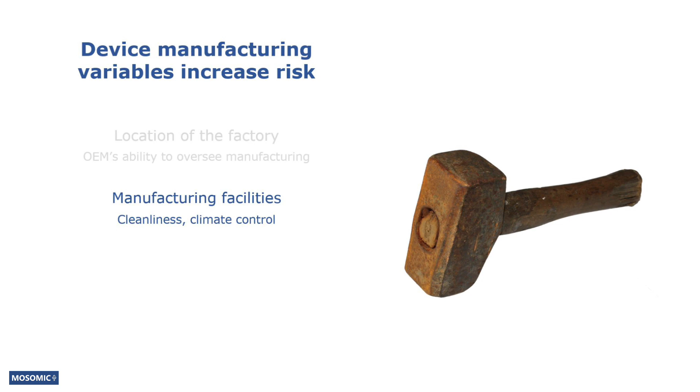Manufacturing facilities, for example, cleanliness and climate control. Production personnel, their know-how when it comes to handling MEMS microphones. And production equipment, for example, accuracy, age, and suitability for microphone handling.

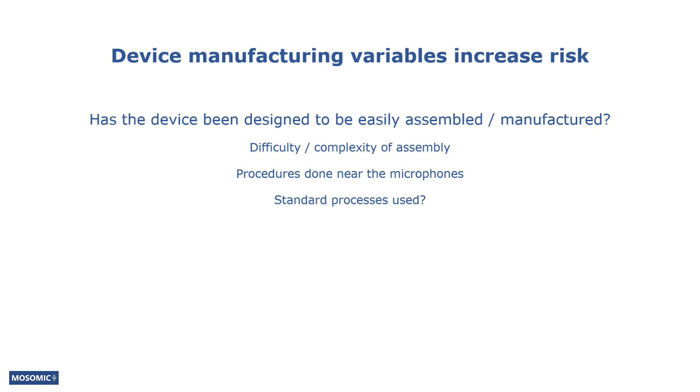Also, the design of the device and its assembly processes can have a big impact on the safety of the microphones. The difficulty and complexity of the device assembly is a key factor. Also, all assembly procedures done near the microphones increase the risk of problems. It's very important that standard procedures and guidelines provided by the microphone supplier are followed.

The microphone supplier typically knows what the microphone can take and what it can't, so their advice should be listened to. Of course, sometimes their requirements may be overly cautious because it's in the microphone manufacturer's best interest to minimize problems. Sometimes a compromise has to be made between increased device production cost and time and microphone safety.

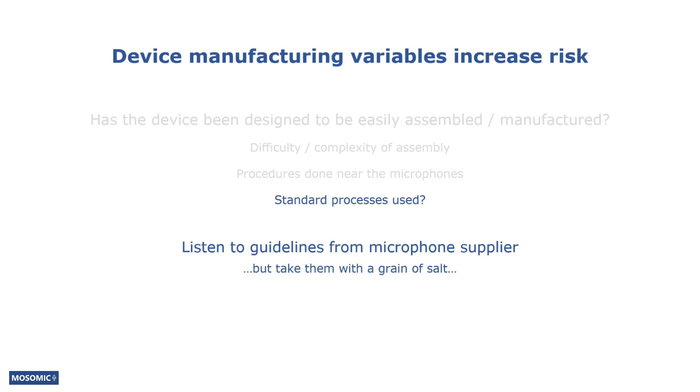Microphones are typically tested at the end of the device assembly process to make sure they work like they should. Sometimes tests may be done also for sub-assemblies. The ability of the tests to reveal problems must be ensured.

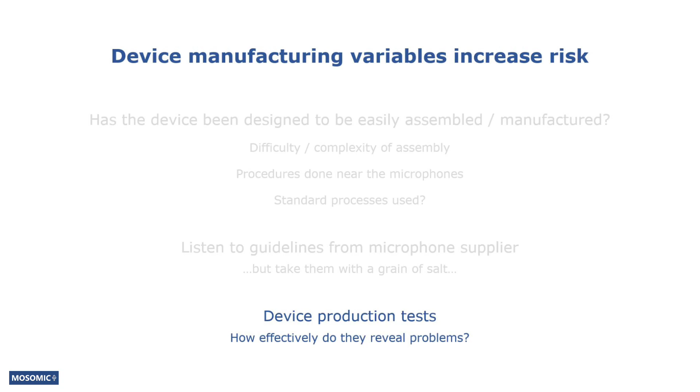There's a wide variety of threats to microphones in device production. First of all, there are mechanical threats. Touching, poking, or other mechanical stresses can compromise the integrity of the microphone package or the microphone sensor. The sensor is in danger if something, for example sharp tweezers, are inserted into the sound port, or if the package is subjected to excessive mechanical deformations or forces. Also, the solder contacts under the microphone may be in danger if the microphone is poked.

Microphone manufacturers don't typically specify any impact forces that would be allowed on the microphone. In other words, all impacts are forbidden. But the maximum mechanical pressure that can be applied on top of the microphone is often specified in the component datasheet.

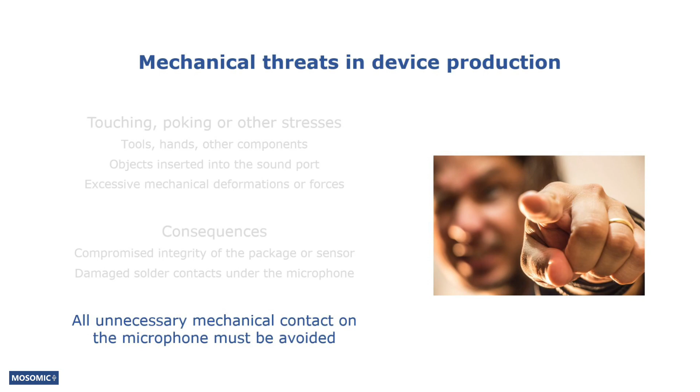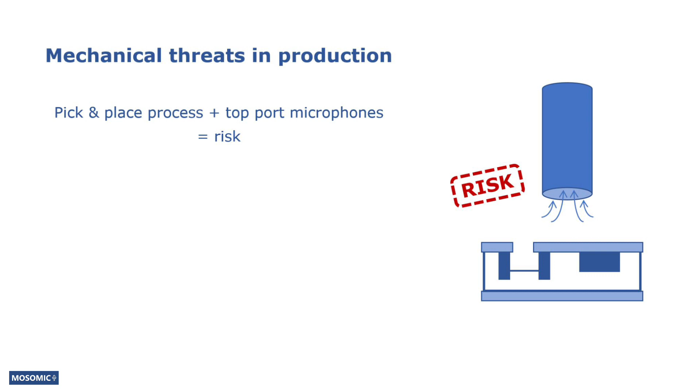Second, the pick-and-place process may jeopardize top port components. In the pick-and-place process, the component is picked from its transportation package, typically a pocket in a tape that's carried on a reel, and placed onto the device circuit board. If the vacuum nozzle of a pick-and-place machine is used to pick up a top port microphone on top of the sound port, the sound sensor is exposed to a strong negative pressure shock that may damage it.

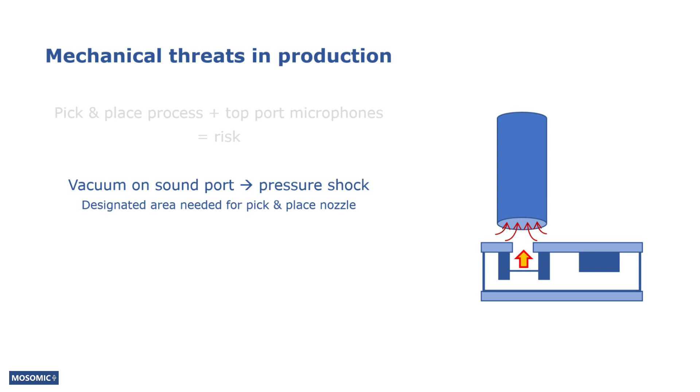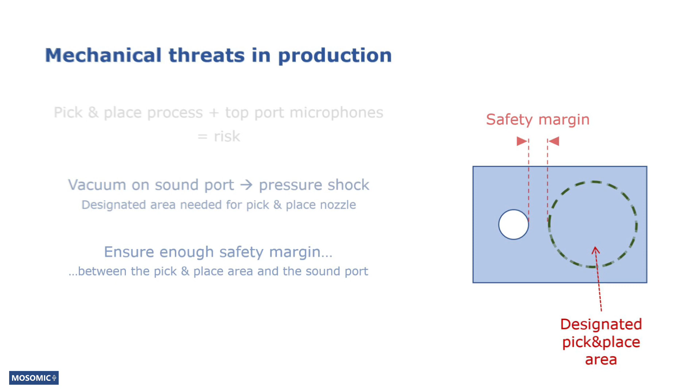Therefore, there must be a designated area for the nozzle of the pick-and-place machine on top of a top port microphone to minimize the chances of pickup being done on top of the sound port. There must also be enough safety margin between the pickup area and the sound port to take into account all tolerances that affect the accuracy of the pickup point. Nozzle dimension tolerances, nozzle placement in the pick-and-place machine, accuracy of the pick-and-place machine, microphone location in the tape and reel, and so on.

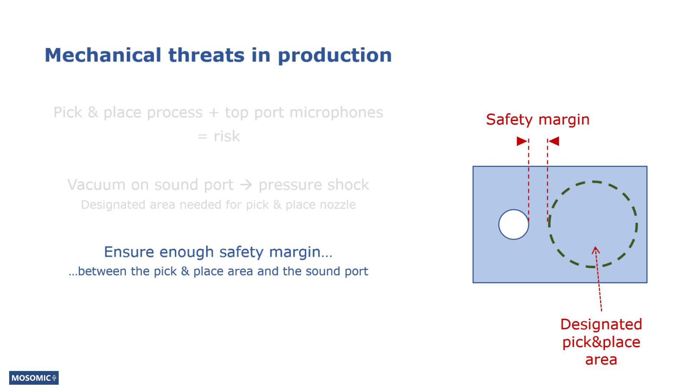The pickup area and recommendations for the vacuum nozzle dimensions should be specified in the microphone datasheet. Bottom port microphones are not in danger because the sound port is located safely under the microphone.

The microphone may also be affected by contamination. The source for the contamination can be production facilities with compromised cleanliness, or, for example, circuit board routing or sawing that may be done near the microphone. There can also be other messy production procedures.

Another threat for MEMS microphones is the cleaning of the device circuit board or an assembly. Common cleaning methods, such as pressurized air, wet cleaning and brushes, can all damage microphones. If pressurized air is applied directly onto the microphone and into the sound port, it can damage the sensor. Wet cleaning is a liquid contaminant that can affect the microphone negatively. The bristles of a brush can also poke into the sound port with dire consequences.

It's important to acknowledge that, after assembly on a circuit board, bottom port microphones are exposed to threats such as contamination that originate on the other side of the board because of the sound channel that goes through the board.

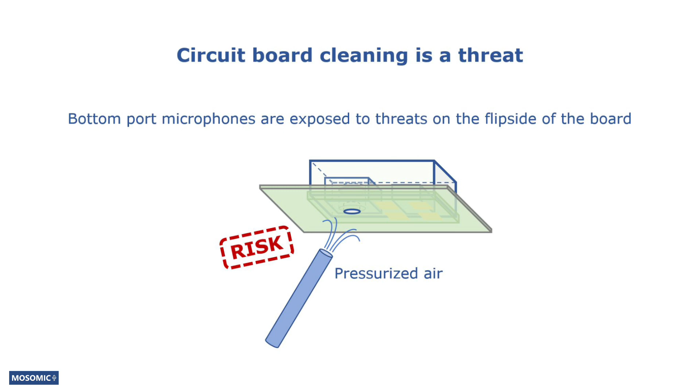Excessive temperatures are another risk to be taken into account. The temperatures can rise too high, for example, if the reflow process of the device doesn't follow standards or if the process is poorly controlled.

The microphone may be exposed to too high temperatures or mishandling also if the microphone is reworked, meaning that a faulty component is replaced with a new one at some point after the reflow process. It should be noted that a microphone gets heated up also if the component next to it gets reworked. The allowed temperature profiles that the microphones are designed to withstand are given in microphone datasheets.

Electrostatic discharges, ESD, are another significant threat microphones face in device production. Like I explained in episodes 9 and 21, the threat is twofold. The discharge can damage the microphone electrically or mechanically because of the pressure pulse caused by the rapid air expansion around the discharge. MEMS microphones are typically designed to withstand ESD.

The immunity levels are given in microphone datasheets for maximum ESD voltage values that the pins of the microphone can withstand. Different values are given for discharges applied via air and in direct contact with the pads. The values vary also for different scenarios, such as a discharge that originates in a person versus a discharge coming from a piece of production machinery. Datasheets may also include ESD-related instructions. If not, you should ask your microphone supplier for advice.

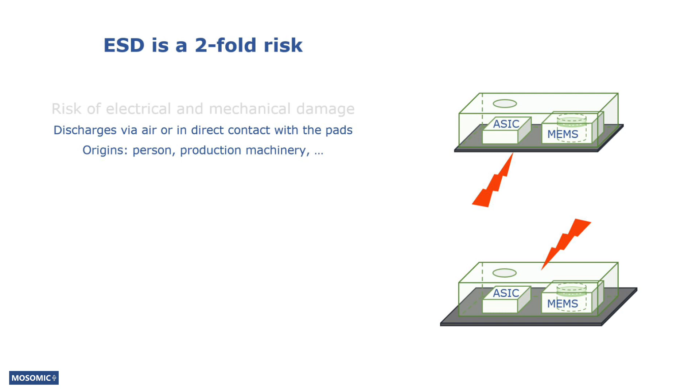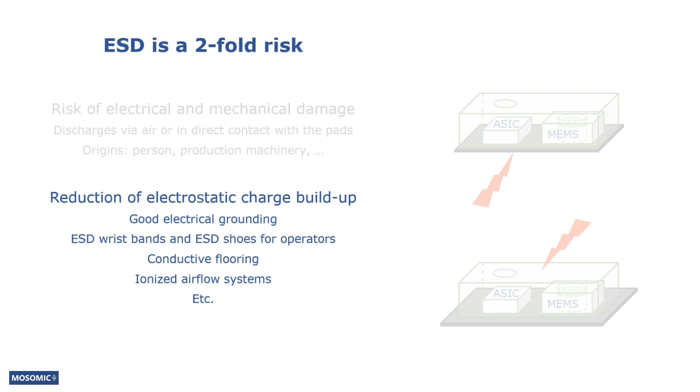To minimize the risk for microphones and for other components, it's important to take the normal ESD precautions in device production. Good electrical grounding of the production machinery, ESD wristbands and ESD shoes worn by the production operators, conductive flooring in the facilities, ionized airflow systems over open trays and reels of microphones, and so on. These methods reduce the buildup of electrostatic charge in people as well as in machines. There are specific standards for the ESD handling of CMOS devices that are good rules to follow also in MEMS microphone production.

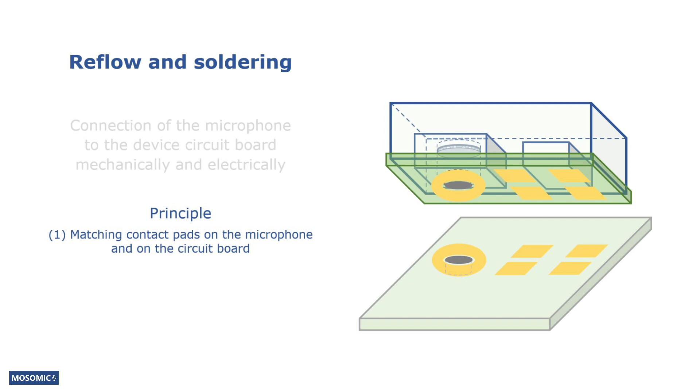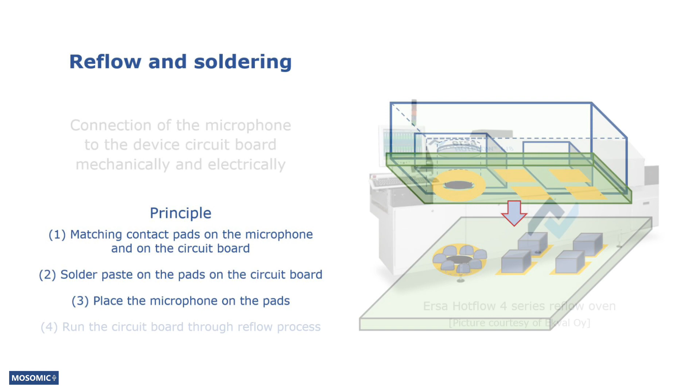I talked a bit about reflow and soldering already, but let's go into a bit more detail. The purpose of soldering is to connect the microphone onto the device circuit board electrically and mechanically. The principle with solder connections is to have matching contact pad patterns on the microphones and on the circuit board, to apply solder paste on the pads on the circuit board, then place the microphone on the pads and run the whole circuit board with the microphone through a reflow process. The reflow process is done in an oven in which the solder material contained in the solder paste melts and adheres to the pads on the microphone and on the circuit board.

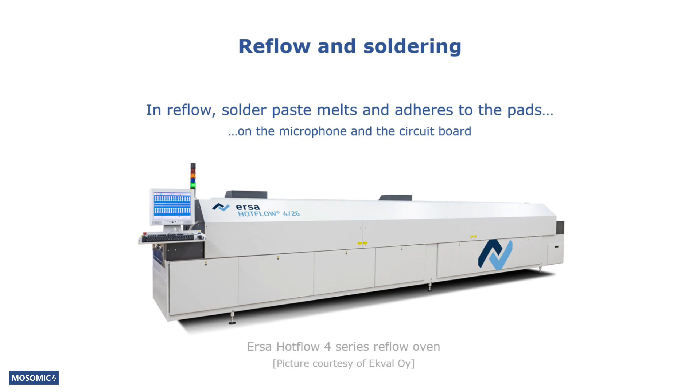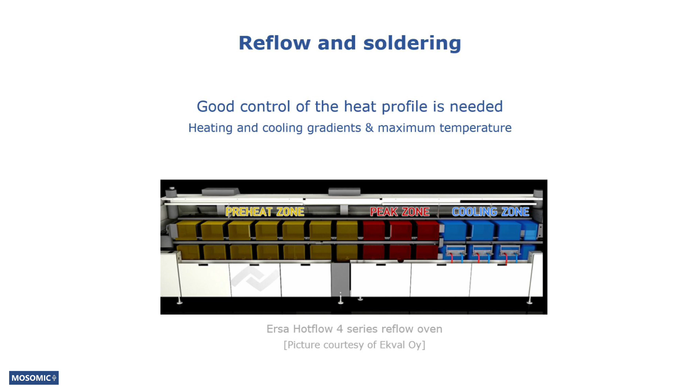The temperature profile that the boards are heated with in the oven is carefully designed to heat, melt and cool the solder connections in a controlled way. The profiles define the heating and cooling gradients as well as the maximum temperature that the microphones experience. The profiles typically follow IPC JEDEC standards. Microphones should be designed to withstand at least 3 soldering processes without significant impact on the reliability or performance of the component. Enduring more than one reflow is required because in many cases the circuit boards go through reflow twice, once for each side of the board. For MEMS microphones, this is typically not a problem.

The consumer electronics reflow profiles currently used are designed for lead-free solder that is less of a burden on the environment than solder with lead. The maximum temperature that microphones should face is 260 degrees Celsius, but in poorly controlled processes this may be exceeded significantly. Exceeding the specified maximum temperature is a reliability risk, so unnecessary thermal stress on the microphone, other components, as well as the circuit board should be avoided.

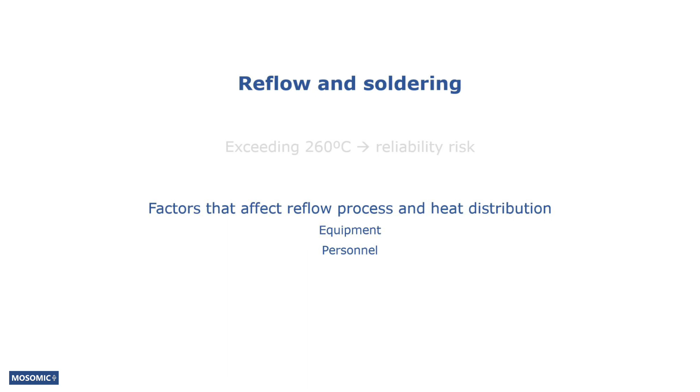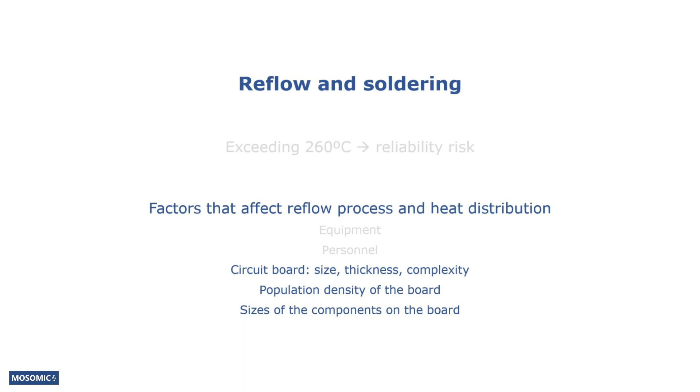The actual level of control on the reflow process and the temperatures that the microphone heats up to depend on the equipment and the skills of the personnel running the reflow process. The level of control depends also on the size, thickness and complexity of the circuit board, as well as the population density of the board and the sizes of the components on it. For example, heat propagation and distribution in a sprawling, flexible circuit board may be difficult to predict and control.

Also, the temperature rise and fall gradients that the microphones face can vary significantly. Too fast heating may cause pressure buildup when the air inside the microphone expands quickly. In the worst case, this can cause the microphone package to disintegrate. This is the case especially for microphones in which the package is held together with solder connections that melt during the device board reflow. Packages held together by adhesives, such as epoxy, are typically less risky in reflow.

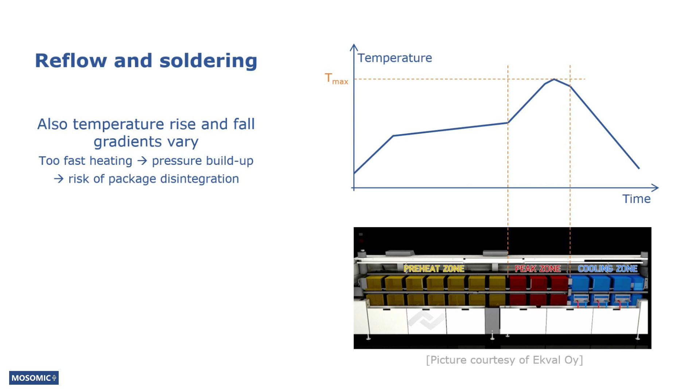Some device manufacturers have put protective tape on the sound ports of microphones to protect them from contamination during the manufacturing process. This is a bad idea, as the tape prevents the escaping of the expanding air inside the microphone, significantly increasing the risk of package disintegration. After reflow, the microphone should be let cool down in a controlled manner for 15 minutes.

The reflow profile should take into account the type of solder paste that is used. A key parameter related to MEMS microphone reflow is moisture sensitivity level, MSL. It describes the tendency of a semiconductor component to absorb moisture from the ambient air into its structures and the tendency of the component to get damaged as a result of the moisture accumulation when it runs through the reflow

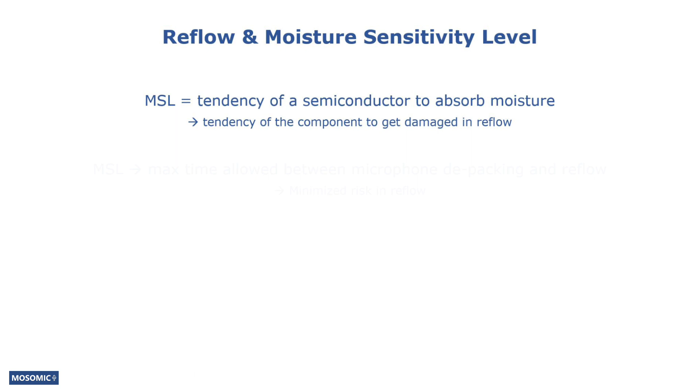process. Thereby, it determines the maximum amount of time a microphone or some other semiconductor component is allowed to sit in normal room conditions before it goes through the reflow process after it's been taken out of the protective moisture-controlled bag it's transported in. If a MEMS microphone is exposed to ambient air and humidity for too long before reflow, the component may get damaged in the reflow because of the moisture it has absorbed into the semiconductor structures.

Therefore, it's important to know the properties of the component when it comes to moisture buildup and the problems the moisture can cause in reflow. The moisture sensitivity levels of MEMS microphones are based on two IPC JEDEC standards. The moisture reflow sensitivity classification for non-hermetic solid-state surface mount devices, and the handling, packing, shipping and use of moisture reflow sensitive surface mount devices.

A typical moisture sensitivity level for MEMS microphones is level 1. The higher the MSL of a microphone is, the stricter the requirements are on its exposure to ambient air and moisture before it goes into the reflow oven.

A key acoustical and mechanical reliability factor in bottom port MEMS microphones is the sealing ring. It's the ring around the bottom port of the component that is soldered against a similar ring on the device circuit board. The soldering forms an acoustical seal between the microphone package and the device circuit board, enabling the formation of a leak-free acoustic channel that enables achieving high acoustical performance of the microphone system.

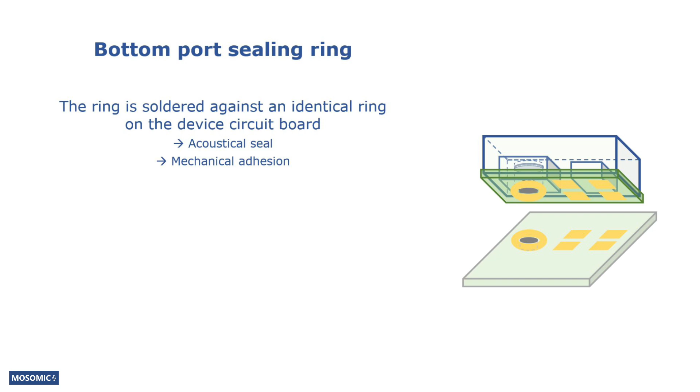Another function of the sealing ring is to be one of the soldered pads that adhere the microphone securely onto the circuit board. The reliability and quality of the soldering are optimized by applying just the right amount of solder paste onto the ring on the device circuit board before the microphone is assembled onto the ring. A too small amount of paste may leave gaps in the ring, leading to leaks in the sound channel.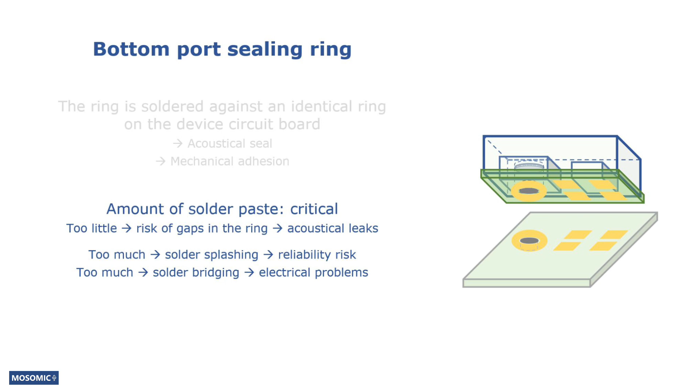Too much solder paste may cause it to splash and end up in wrong places, even into the microphone sound channel, when the microphone is placed onto the circuit board by a high-speed pick-and-place machine. Too much paste can also cause solder bridging between the ring and adjacent solder pads, which can naturally cause problems for the whole system. Gas bubbles in the ring may cause leaks or weaken the mechanical integrity of the ring.

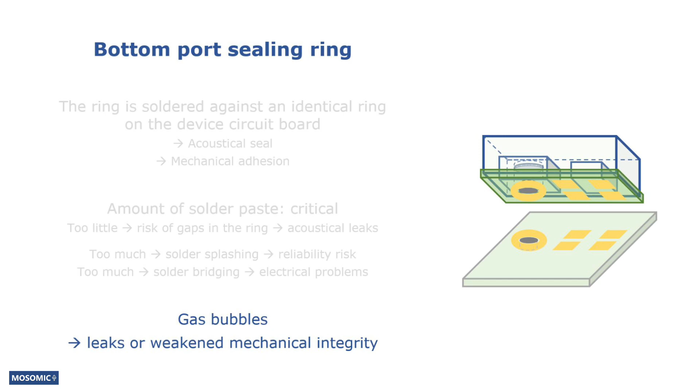Solder paste is applied on the circuit board and the pads by placing a stencil on the board and the pads, and then forcing solder paste through the holes in the stencil with a squeegee. The openings in the stencil match approximately the layout and sizes of the pads and solder ring on the bottom of the microphone. For top-port microphones that have only regular contact pads on the bottom, the stencil design is simple.

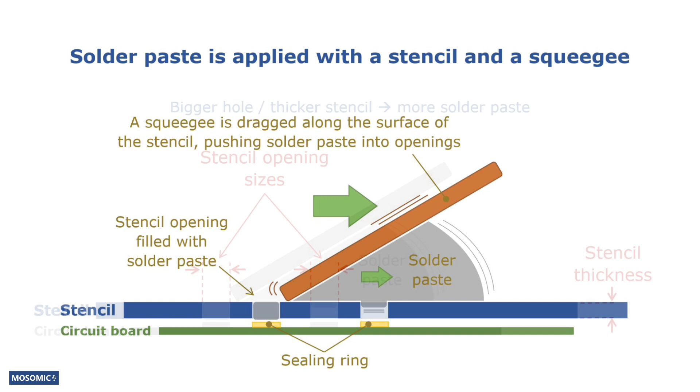For bottom-port components, the stencil and solder paste application in general are a bit more complex because of the sealing ring. The amount of solder paste applied on each contact pad is regulated by adjusting the design of the stencil. The layouts, sizes and locations of the openings in the stencil, as well as the thickness of the stencil, are key variables. The bigger the hole is and the thicker the stencil is, the more solder paste will end up on the sealing ring.

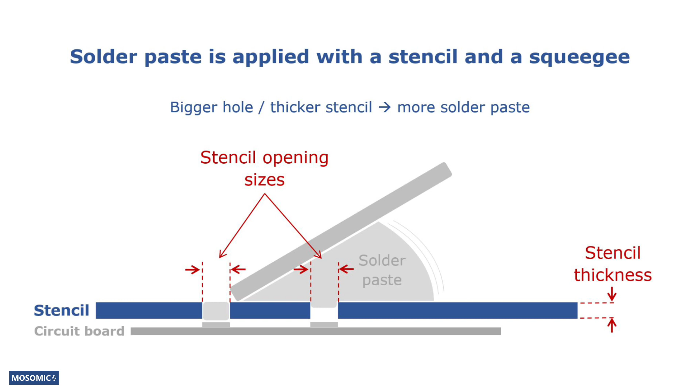Guidelines for designing an optimal solder stencil and the land patterns on the circuit board are often given in microphone datasheets. Other key parameters for the solder paste application process are paste type, especially its particle size, as well as squeegee pressure and speed. Solder paste recommendations can sometimes be found in the microphone datasheet. The paste should be a no-clean flux type to avoid the need to clean the circuit board afterwards.

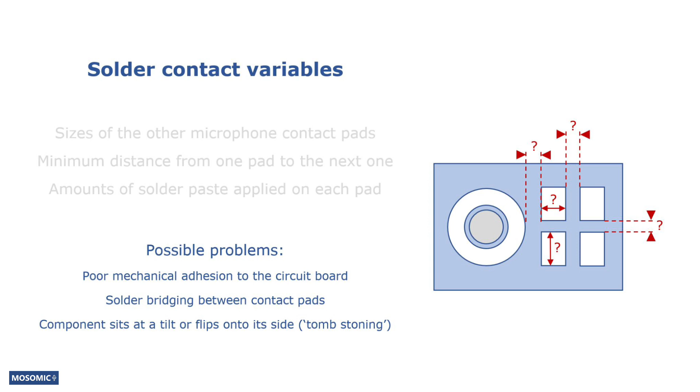Also, the sizes of the other contact pads on the bottom of the microphone, the minimum distance from one pad to the next one, and the amounts of solder paste applied on each pad must be designed appropriately to ensure reliable electrical contacts as well as reliable mechanical adhesion of the component to the circuit board. Choosing the right parameters reduces the risk of problems such as solder bridging or tombstoning, the phenomenon where the component sits at a tilt on the circuit board, or in a bad case flips onto its side due to a poorly balanced contact pad design.

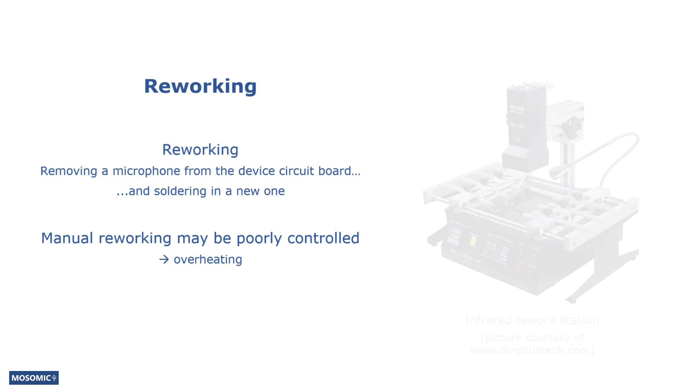Okay, let's talk about reworking. It's the process of removing a component from the device circuit board and replacing it with a new one. This is typically done to replace a faulty component. A manual rework process, done for example with a soldering iron, can be a very uncontrolled and risky process in terms of the heat exposure of the microphone, the adjacent components on the circuit board, and the circuit board itself. The repeatability of the process is very questionable. Therefore, reworking should always be done with a rework station.

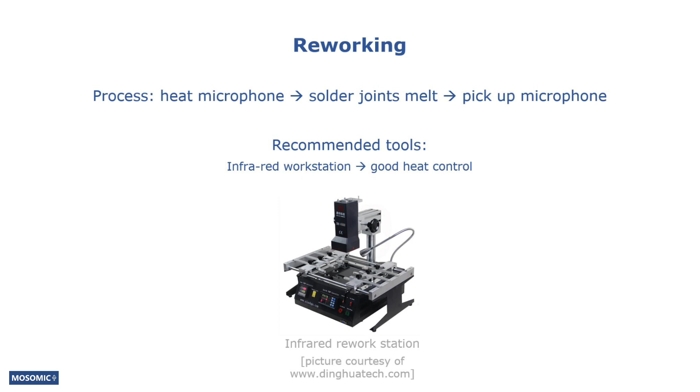The microphone is removed by heating the contact pads that hold the microphone to the circuit board so that they melt, and then picking the microphone up. An infrared workstation, if one is available, is often the best way to do reworking. It enables precise focusing of the heat to the right place. For manual reworking, thermal tweezers designed for surface-mounted component removal are a good tool. They heat up the component and solder joints and then grip and pick the microphone up when it's hot enough and ready to be removed.

If an infrared station or thermal tweezers are not available and the heating must be done manually, the heating may have to be done by heating the board on the opposite side from the microphone so that the heat can be directed onto the solder pads. When the solder joints have melted and the component is loose, it can be picked off the board with tweezers. When removing the component, it should be gripped with tweezers from its bottom layer, the substrate plate, in order to avoid disintegration of the package.

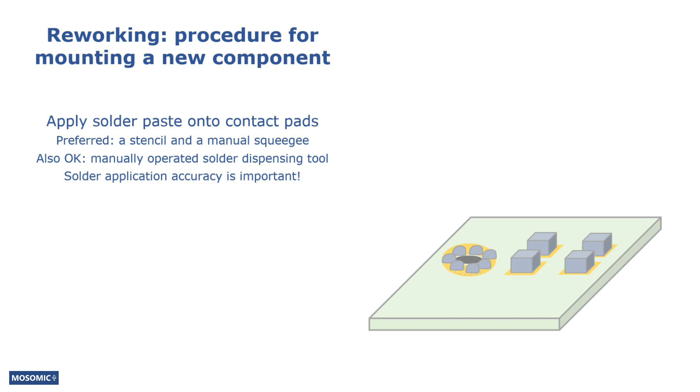The removal should not be done with a hot air nozzle combined with a vacuum tool, because the focusing and spreading of the heat is very difficult to control. A hot air nozzle is basically a small hot air blower. The procedure for mounting a new microphone onto the circuit board is as follows. Solder paste is applied onto the contact pads either with a manually operated solder dispensing system or preferably with a stencil and a manual squeegee. Solder application accuracy is especially important with bottom port microphones. Accuracy ensures a well-sealed sealing ring around the sound port and helps avoid solder ending up in the sound port.

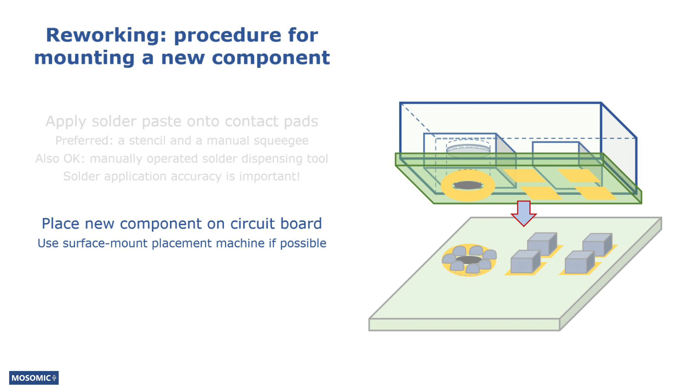A new component is placed on the circuit board with a surface mount placement machine. Manual placement is inaccurate and risky. The component is then reflowed, preferably with an infrared rework station. Using a suitable reflow profile with an appropriately slow heat ramp-up gradient, with a preheating phase, and a well-controlled maximum temperature is important. Again, a hot air rework nozzle should not be used for reflowing the new component in its place because of the poor controllability of the process. Just like in the case of a reflow oven, the sound port of the microphone should not be covered with tape or any other method during reworking.

When reworking other components next to a MEMS microphone, it's important to make sure that the process is well controlled and excessive temperatures on the microphone are avoided. An infrared workstation is recommended also in this case to maximize temperature control and reworking repeatability. Again, the use of a hot air nozzle should be avoided. The use of heat shields to protect the microphone should be considered if poorly controlled heat sources are used for reworking components near the microphone. It's also important to make sure that adjacent components don't get overheated when a microphone is reworked. Damaging other components can be avoided by using well-controlled methods to apply the heat, and possibly by shielding the other components. For all reworking involving MEMS microphones, the personnel must be familiar with the requirements microphones set for heat application.

Okay, that's it for this episode. The next 2 episodes will be about electroacoustic testing of MEMS microphones.